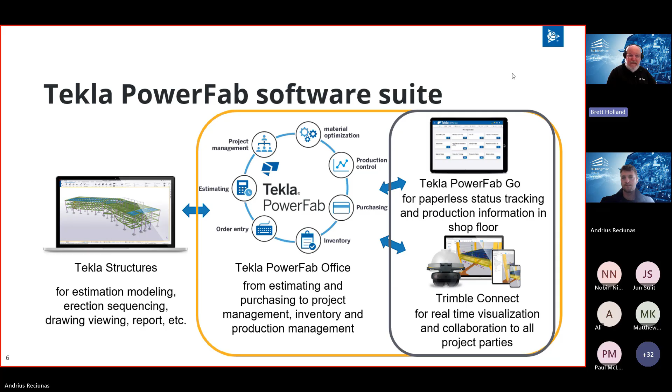With the new connector in 2025, one of the biggest things, one of the holdbacks on any MIS or MRP system, has always been: are the grades correct? Are the sizes correct? Can we actually purchase those items? Can we get those things? With the connector, it works through Tekla, from Tekla PowerFab through Tekla Structures and back to Tekla PowerFab again. So when we create a project in Tekla PowerFab, we invite our detailer to that project, and they load us up as their fabricator.

They see our product catalog, so they know exactly what we can procure and purchase in that area, and then we can validate that model against the detailer's items. Then when we're issuing the packages, rather than the traditional pull it out of Tekla Structures and email a zip file to the fabricator, it's a live interaction through the cloud.

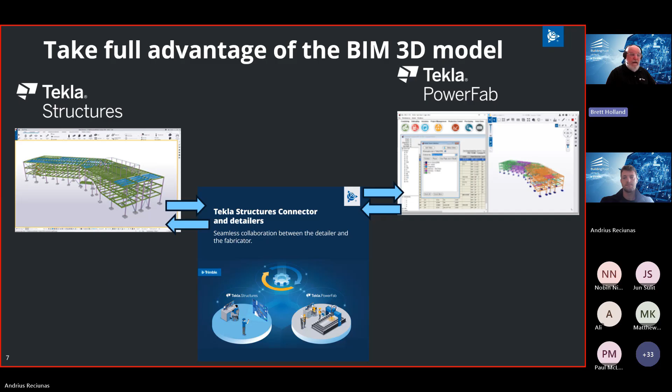It comes straight into Tekla PowerFab, connecting with the Trimble Connect cloud. We'll get notification that there's a new submittal from the detailer without having to leave our project as we're working in it. So if we go to the next one.

So yeah, like I said, it's a full workflow, we'll just quickly go through here. Your model visualization back with Trimble Connect, from estimating through purchasing, your optimization for cut lists, purchasing, right through the shop floor on the tablets, shipping and shipping manifests, and through the dashboard so we can see hours and tons completed on the job.

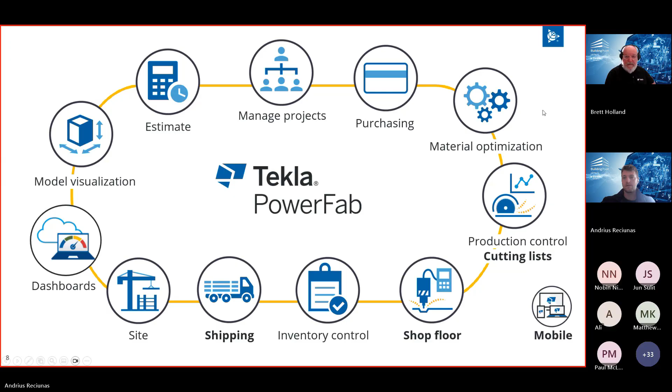All right, now we'll go through the demo. So that's a very brief overview of PowerFab. If anyone does want to see more, we can certainly send some more information or do a demo on what PowerFab fully encompasses.

Thanks, Brett, for that. So we kind of split it up to see like the detailers we joined in. I just wanted to show and emphasize what I've been doing and the probably usual workflow.

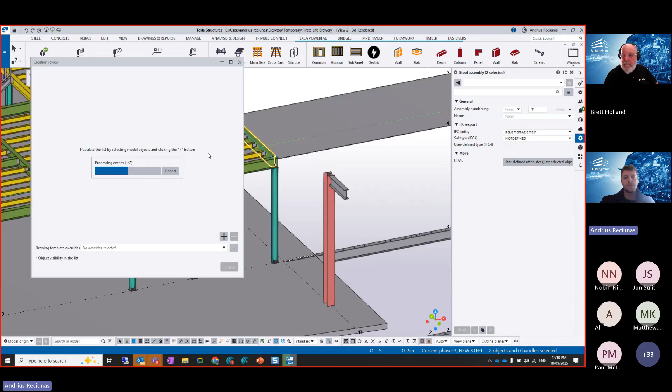So let's say you select a few columns when you do it, and you create your fabrication drawings, your assemblies, your single parts as well. Within the software, you click create, you have those PDFs ready.

Then when it's time to create NC files, again you select those members, you go into your export mode, you select NC files, you go in here and export, select what kind of settings you need here, and so forth.

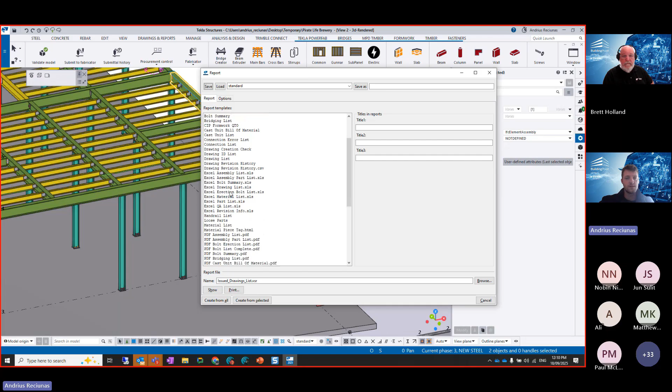Then when it's time to bundle up some reports, you go to the reporting of it. You select which ones you need, some Excel spreadsheets, PDFs, and so forth, whatever the fabricator asks for at that point. And then if you need DXF files, you need to go and convert the NC files to DXF.

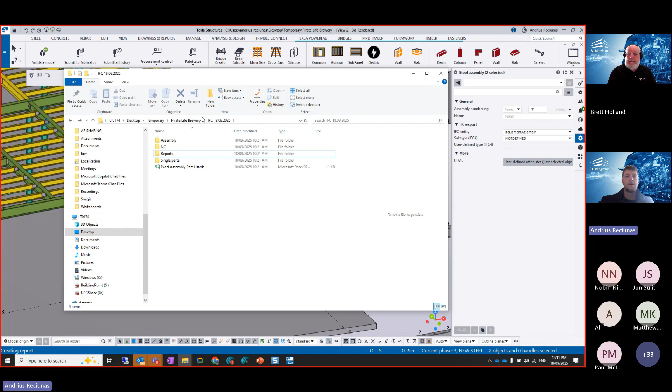Later on, you take your PDFs, your report files, your CNC files, and bundle it up nicely and tightly within this folder structure. So you have the single parts, drawings, NC files, the DXF files if needed as well, and any other file types they might need, maybe a submittal list of what's included and what's not. Then you go back and zip the folder, put it in an email, and send it through.

And that's the usual way that probably everyone's doing it, though you might have some automation tools maybe developed by some programmer and so forth. But from a detailer's perspective, with the new connector in the PowerFab 2025 version here in Tekla, just from a detailer's view, I want to show quickly what kind of changes happen when you select the fabricator.

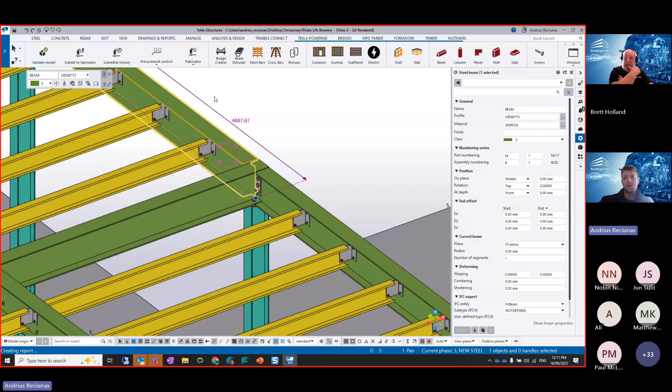So you can see here, it's your normal profile, material, finish, nothing different. This is the standard one, so I can just select it from a list, either material or finish. Nothing too difficult from here.

But then if I go in and select the fabricator and apply these changes, you'll see a few things change directly in there. A fabricator is all the settings that Brett as a fabricator created and invited me to, basically to his shop with his available profiles, materials, finishes and so forth. So what it actually did is it popped up a notification that something changed.

If I now quickly select a member, there are a few changes here. My finish appeared to only show those that are available from the fabricator, and then I can just click and choose which one I want from here. I don't need to type it in.

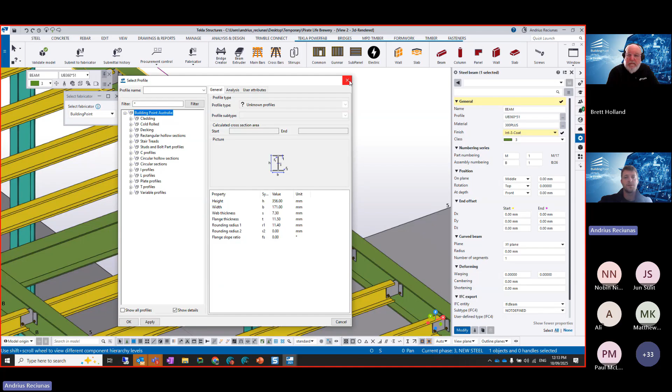If I go to the materials section, I can, let's say, untick all profiles, and only the profiles that the fabricator has appear here. So I eliminated the risk of using non-standard profiles that the fabricator may not have. If I start using some unavailable materials from his side, I tend to see this exclamation mark straight away.

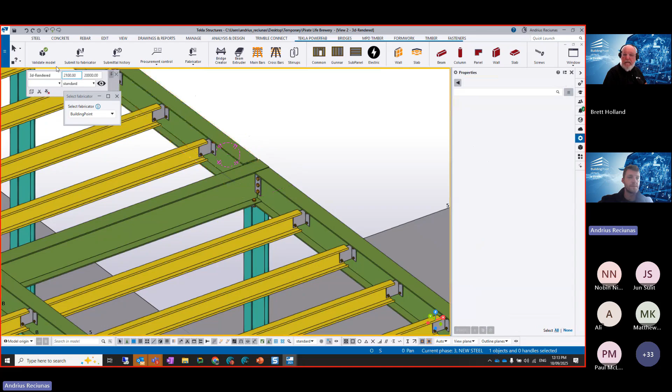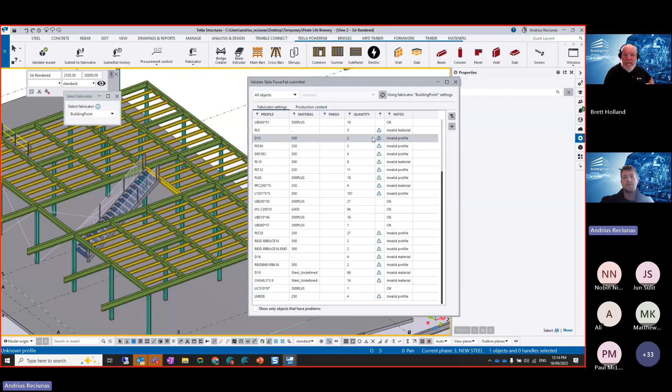Even without compiling any packages or sending anything in, I can actually see what kind of errors I'm having. So this is a demo model, very simple and out of place. All the profiles and materials are not based on any real project.

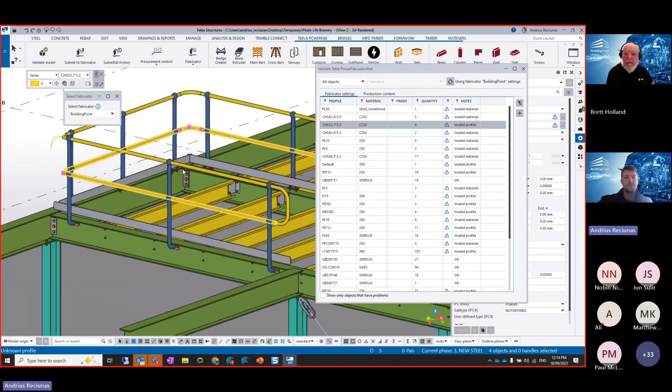So if this is an invalid material for the profile, or an invalid profile, if I select it, it highlights within the model which ones are affected. This is something I can see straight out of the box as a detailer, without even going into the more advanced things that Brett will cover in a few moments.

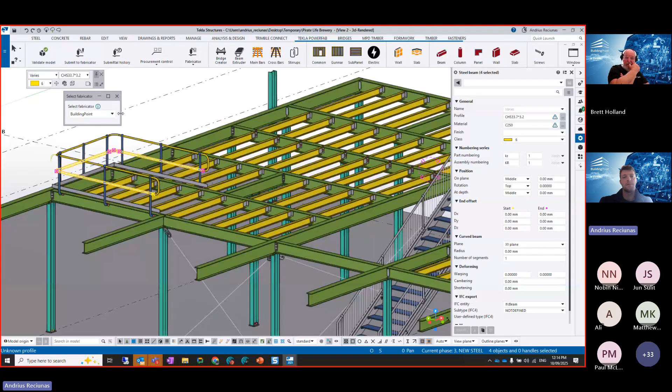You can also have separate fabricators set up here. If you have a list of fabricators you deal with, even on the same project, if you're working with a portion of it, say phase 1 is a portion of the building on the right side, I can send that to one fabricator, and phase 2 on the left to a different fabricator. All of these will have different elements within them.

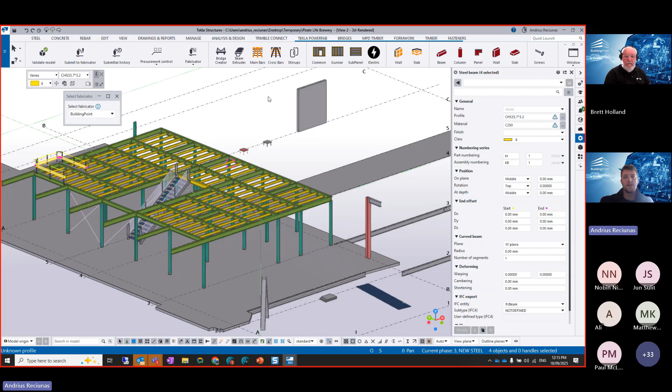So even here, if I select this, straight away the material and profiles are shown as incorrect. That's a very short one of what I wanted to show. For a bigger, more in-depth look, I'll stop sharing and Brett can take over.

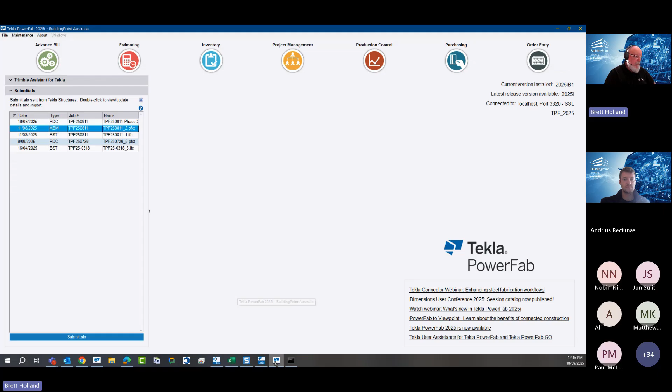Like Andrius said, you can select - if you've already worked with a fabricator, when you set up your project properties in your project setup, you've got your fabricator selected automatically in there. What they will do is link you in Tekla PowerFab. In their project management area, if I open the job, I've created a Trimble Connect project under my project management area, and then I've invited my detailers, myself and Andrius, to this project. So we're both linked to that one Trimble Connect project via this project management area.

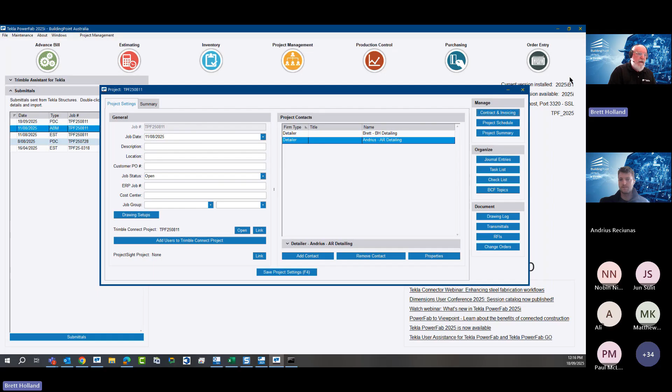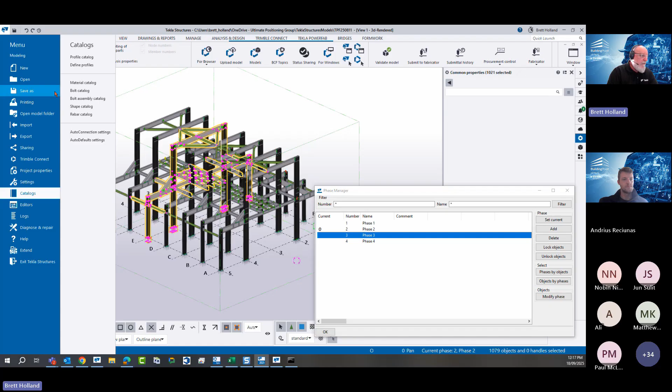Now going back to structures, if I select this area and go to - I've already got my fabricator selected, so we're already in there as the fabricator, seeing the profiles go through. That came up on the wrong screen. So my profiles are coming through - if I go to my profile catalog, I'm only seeing the profile catalog for that fabricator.

If I tick off the show all, I'm only seeing the profiles for that one fabricator. I can tick it on and show all. So if things like grating or handrails aren't available, we can still show all the Tekla library and add those items in, and then we just need to add those into PowerFab as well.

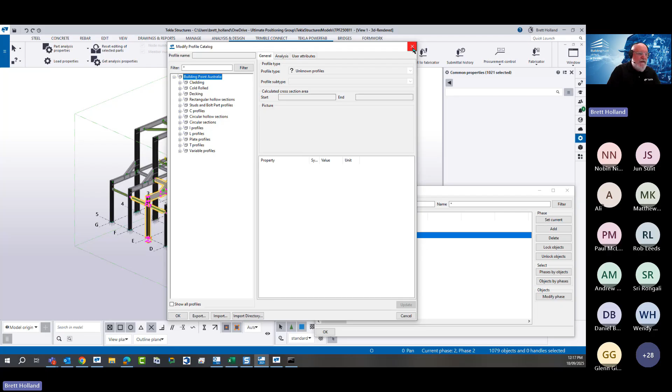There are different items here that we need to go through because the library is going to grow. There are things out of the box that we don't have in here, like rebar, things like that. We can develop those or add those products in later as people start to use them. So I've selected against that item, as Andrius showed.

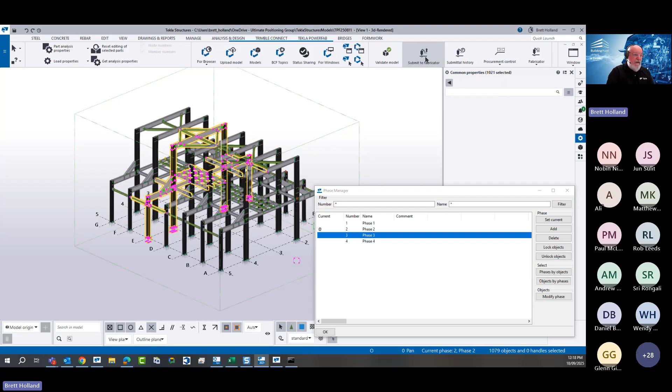With the validate model, I've already done that validating, so I can go through - I've done phase 1, I've done phase 2. I can submit to the fabricator, and I get the Tekla PowerFab screen coming up. So I've got different options here.

Estimating is the IFC, like we discussed before. With the graphite license, I can create that estimating model and push it through to send it off to the fabricator. So for detailers - not that you'll ever be looking for work - there's the opportunity to create an estimating model for items, and we can send that to you.

Procurement - this is if we want to get ahead of the game and have material ready to go. We can create ABM, or advance bill of material numbering, within the model. So we can set a model numbering, and it'll recognize the GUID from Tekla Structures all the way through, because the unique identifier doesn't change all the way through.

So once a column, rafter or beam is in a position, it stays with it. With that procurement, we can have an ABM number 1, ABM number 2, ABM number 3. When we go through and get the issued for construction job, and we've already procured against those items, it recognizes that we've purchased this as an ABM 3 against that GUID, and we'll nest against those items in the job further down the track as we get that IFC release through.

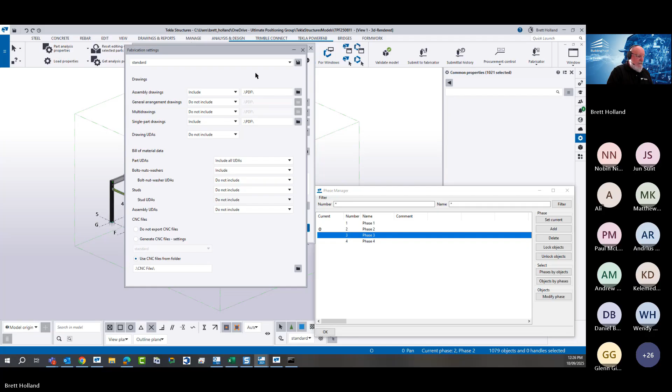CNC files, again, use that one folder for just those CNC files, because let the system work it out for you. If we filter these items down, I'll go and save that, close that, and I'm back in here.

So I'm just going to select from objects in the model, because I'm going to go back. Yeah, still selected from the model. I'm just issuing phase 3, so I can go in and name this.

The biggest thing is, if you want to do something manual, just give it the project number and phase 3, just so that you know what's going through. And we just want the project.

Select, yeah, so selected from the model where it's going, the folder it's going to. Even if you're not working with a PowerFab user, this export only will create that file, and I'll show you the file once we've exported it as well.

So if you just did the export only, haven't done full numbering for the whole job, that's fine, and don't panic with these. The CNC file's missing - there's no CNC files for anchor rods or anything like that, so you will get those errors. You do get a log come through, so you can see what errors are going through.

Sometimes I'm getting the guys saying there's items missing, so you can either do the view log from here or the view log from Tekla PowerFab as to what didn't come through, or what didn't work. Often it's a numbering issue within the model. Again, the system telling us where we've gone wrong or where we haven't gone wrong.

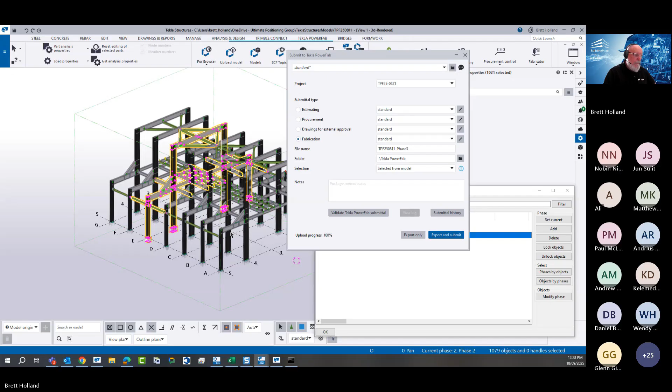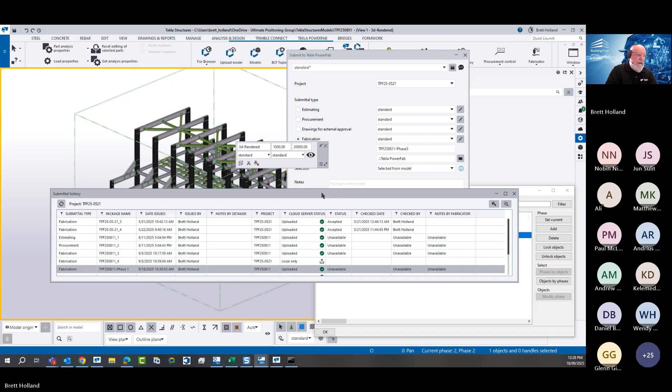So that upload progress is at 100%, so it'll open up my submittal history. I can go through and see all the submittals that have been done for this project against the project number. If I click out of the back screen, I can also see, so my phase one is here, selected in model, it'll show me what was submitted with that package, or highlight what was submitted in that package.

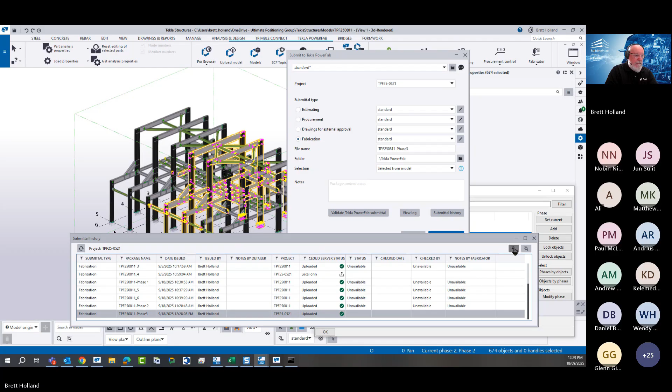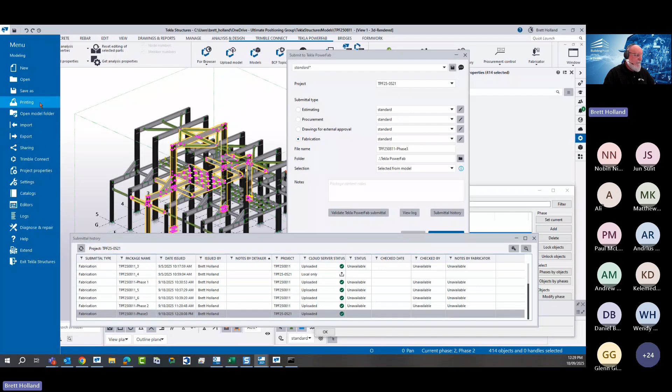So these unavailables have already been imported, but I can see what was submitted with that, and this is the one we've just done now. So where we've submitted - if you want to know where you had it submitted, it's all part of that, or what you've issued. And like I say, even if you're not issuing it to a PowerFab user, we can use this and hopefully simplify the process that you've got to go through in getting that folder or that file, like Andrius showed you on how he used to do it, and probably you guys are doing it as well.

So under Tekla PowerFab in your model folder, you'll get your fabrication thing. So these are just the zip file, the PFXT file.

So if you go into your 7-zip - I don't want to compress it. Why is it not working now? 7-zip. Sorry about that, it's decided to go. So there, well, that one will be better.

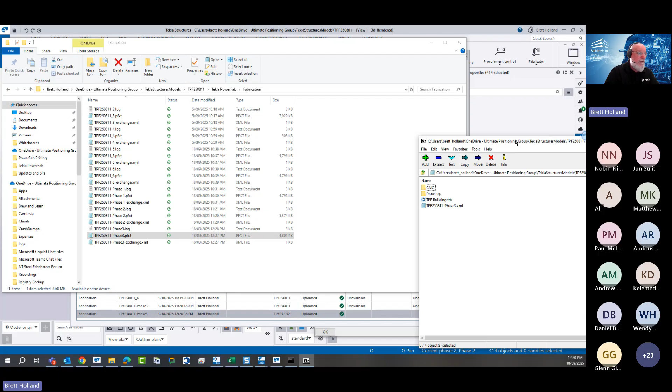If I select the right file, it's bundled together. So it's given me the Trimble file. The XML is my bill of materials, and all my CNC files separated into plates and shafts to go through on that item.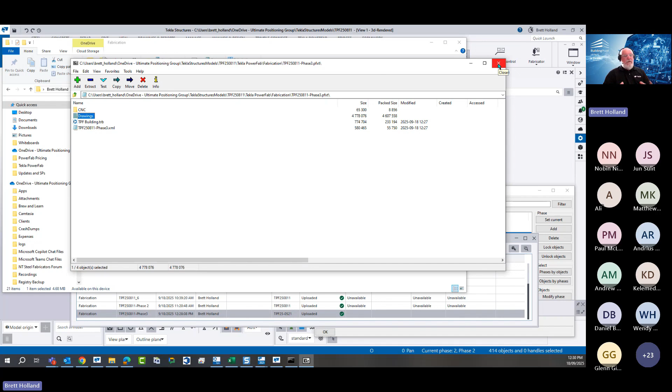All my PDF drawings are bundled, so assemblies and single parts. I don't know how much further you need to break it down, but I've got my phase one, I'm on phase 3 items, and they're all done from sorting, from selecting from the model, getting those things through.

And then in the PowerFab side of things, I'll move across to here. So again, it's all linked to this project management and all through the Trimble Connect from the PowerFab side.

If I go to maintenance, I have what we have in automated events. So every 15 minutes, it's looking for a transmittal or a submittal from Tekla structures, so I don't have to go through and look for these items. I can be in my production control area, and it will come up in the screen.

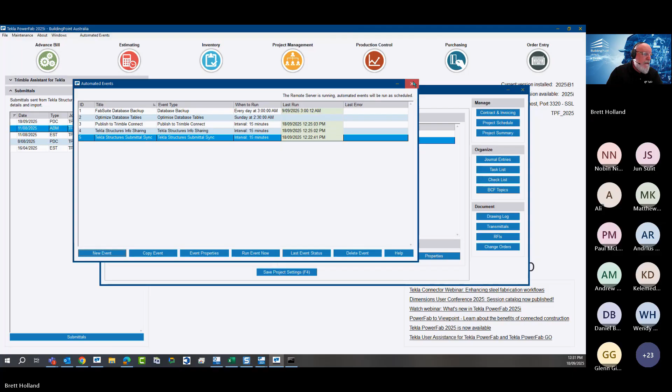So if I'm in the job, I'll get this outstanding submittals come through. We've got a submittal to run in here. So this will be the phase 2. If I go through and check my submittals, I can sync them now.

So if you ring up the fabricator and say, hey, I've just issued a variation on a job, it's going to affect some things, they can go straight in and sync the submittals within straight away, not having to wait for that automated event to run these items through.

Again, so this procurement one, like what I said with the advanced bill of materials, this is prior to numbering. We can go through, and when we do a procurement, it'll give you preliminary numbers based on the system we want to have in place, or what the fabricator wants. Default out of the box is ABM dash or ABM numbers going through.

Estimating is all that, the estimating IFC, so it's going to have all our connections and everything in there. So we've got our connections, our reports run. So yeah, so that's updated there.

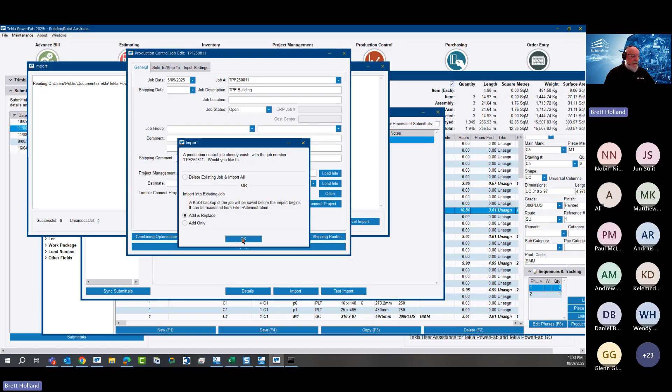We've got the options here to add and replace, add only, things like that, so normally add and replace, so if there's any issues going through, it'll upload any new things. And again, here it's where I'm getting these production codes or the mapping of these items.

So where I was saying about the user-defined field, if I go to production codes, I've got my production route set up as my parts, shop paint, shop unpainted, my production code is beam heavy, beam light, beam medium, and I've got my shipping route set up as galvanizers and subcontract painters. So we're looking at those user-defined fields to bring those items in so that it's automatically done as soon as we come through.

This screen is our change management screen. We've got a few changes here. The drawing numbers change. So what issues have gone through?

Got a duplicate piece mark here, so I could send this. I could cancel this import and send that back to the detailer and say, hey, listen, check PB1, there's a duplicate piece mark somewhere in there. It'll save, and so it'll allow me to do that, and it'll save for later.

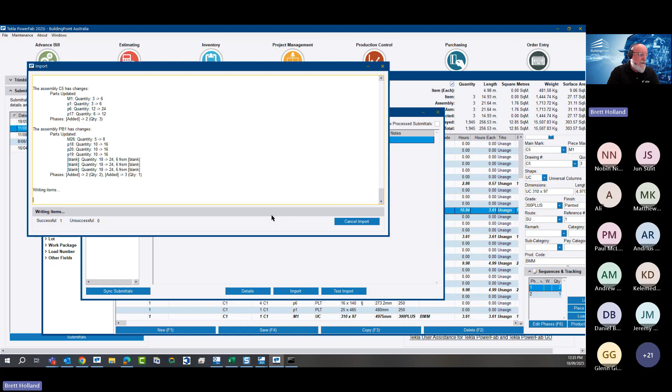We can go back through and go through those items. So yeah, we've got a couple of duplicate piece marks within here that I can go back to the detailer about. So I can continue that, and it'll automatically put those on hold within the system. So I can continue on with the rest of the job.

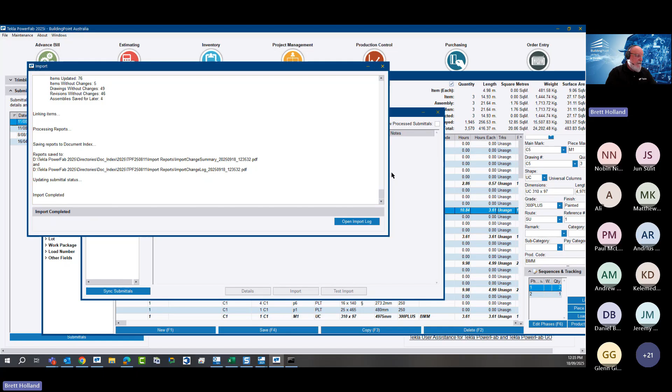I don't have to stop that, but I can still go back to the detailer because it'll give me my log files as well. I can send the problem files back to the detailer, and they can go through and search those items for what's missing. But it's popped it on hold here.

So somewhere in here, I've got it could be that round up, round down on plates and things like that, but I can go through and send those logs back. If I go into production control, I get those in my document index.

I've got my import templates in order, so if I open that file and bring it across, these are live things, so I can go in and see what my problems are. It'll show me where my issues are, what my changes are, and what my warnings were within there.

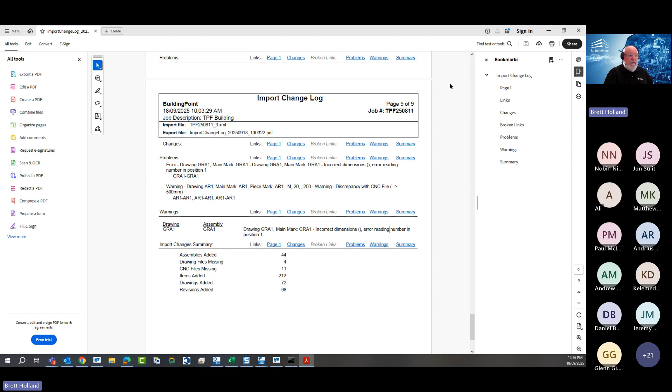I can send these back to the detailer to say we've had issues with some of these items, what broken links or anything we've got, and the main summary. The full summary will also give me how many assemblies we've added on this import, and how many files were missing.

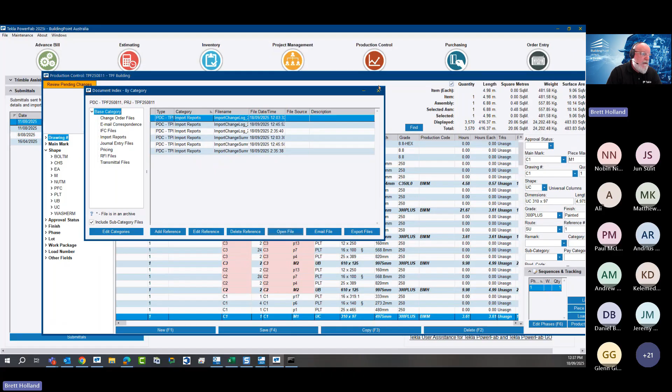So yeah, I can go back and say there was 4 files missing, do you know what these were, or whatever. Yeah, so that's about it. That's the process under modern, or with the connector for getting those things through.

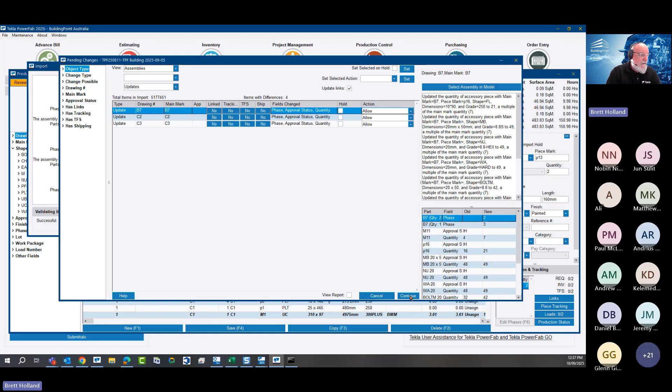So those pending changes - once it'll bring up this review pending changes for what we've got, it'll open up just the items that have gone through and tell us. So it seems that they fixed themselves up going through.

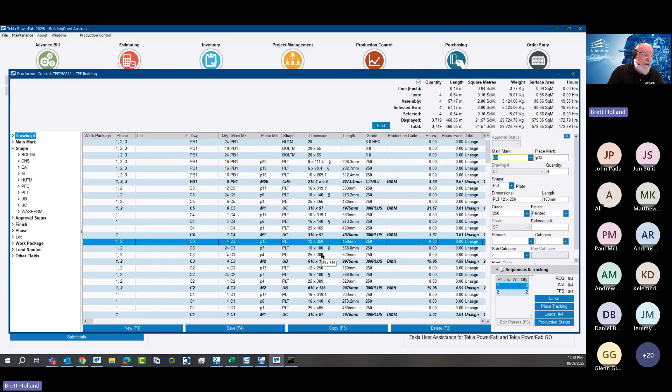So it must have - when I brought it in, it's changed it, so it's done a translation and changed that part to plate rather than FLs as they've gone through. So it's fixed itself up.

I've gone through and run that, and now the transmitter's gone through and cleaned that all up, or that change management screen has cleaned that all up. So nothing's on hold now for those items, on those imports or on those translations.

And that's another thing with modern, because we're getting a lot - I was talking to someone yesterday at the ASI convention. Everything used to be cut on a cropper and punched, so a lot of flat bars on coils and punching holes, because we wanted to get ahead on those things. Nowadays, everything's either laser cut or plasma cut on the plate side of things.

So it's very often now that we don't want to see those flat items. So I've created a translation on plate items to make them into plate items from flat items when they come in, because I'm just going to send them off either to a subcontract laser company, or process them in-house.

So there's a lot of things we can do on both sides here that just make it easier for a fabricator and a detailer to get the right information to a fabricator, and for a fabricator to adjust any information that they need to go through, because a lot of the things with our CC3 work...

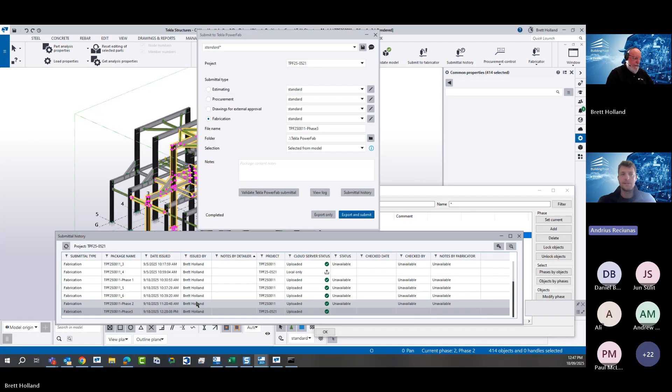We haven't touched much on Trimble Connect, which is becoming the central part of all the Trimble products. There is status sharing within it. So anytime a fabricator receives a package and starts working on some of those members or plates, he can mark those within the Trimble Connect project, and then at any given moment, all the stakeholders invited to that project—the detailer, the project manager, the engineer, the site guys—can visualize which columns, beams and plates are in production, haven't been started, finished off, or have errors and are on pause.

We will be doing a separate webinar about Trimble Connect. We'll try to make that a more in-depth one, because it's come a very long way and has so many new features. Every time we do a demonstration of Trimble Connect, everyone's quite surprised how many features it has that they didn't even think about.

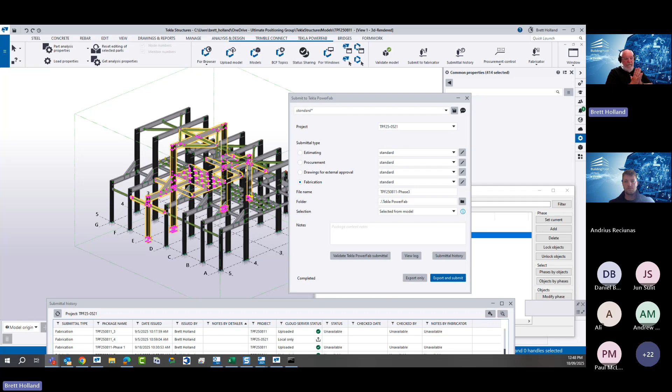Another question from Michael: as a fabricator, how do we share our catalogs and grades with external detailers? So it's the same again—same as what we did with me and Andrius. In PowerFab, we've got our address books.

So create a firm as a detailer. That opens up, so as soon as I put in a detailer and a subcontractor, I can share the information I want - my shape, grade, sizes, my finish, and my Advance Bill of material settings. I'm getting all those sent through. You don't have to send them all, but you can, and there's no harm in sending it all through.

Then when they connect to you as a fabricator, Tekla Structures will do the parametrics of what you've got in your system. So just in your address book, create your detailers. If you get a new detailer, you just put them in, and then they should have you as a fabricator moving forward on those.

Every time you'll be able to load them up with their latest settings and things. So if they add new items, it'll do the parametric update to the fabricator every time they allocate you as a fabricator in that project.